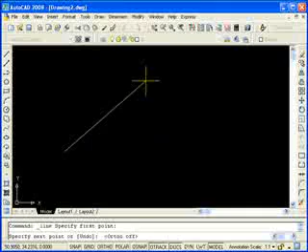Anytime I hit my index finger mouse button, you'll see a red circle pop up. And if I hit my middle finger mouse button, you'll see a blue circle pop up. That's an excellent way for you to follow along and realize what buttons I'm hitting. The beauty of these tutorials is that you can pause, rewind, and slow them down as needed. So again, starting my line command.

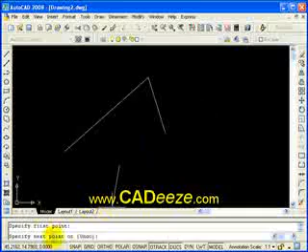AutoCAD's asking me to specify first point. I pick my first point, I get my rubber band. Now on my command line, AutoCAD is saying, okay, you've picked your first point, now specify the next point. Using my pick button, my index finger mouse button, I'm going to pick my second point. And with the line command, AutoCAD just continues to ask me to specify the next point. So I can continue to pick and pick until I'm finished picking points.

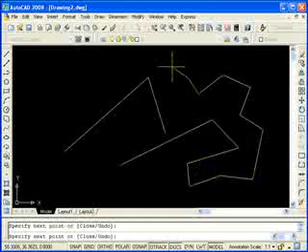When I'm finished, I can hit my middle finger mouse button, and that's going to pull up this menu right here. I can click on any of these options, and in this case I'm going to pick Enter. When the line command is complete, you'll notice I've got a blank command prompt again, ready for my next command.

This time I'm going to type in LINE, hit my Enter button on my keyboard to start the line command, and pick a couple of points. When I'm finished picking points, this time I'm going to hit my Enter key on my keyboard. That again ends the line command.

Remember, you can hit Enter by hitting your Enter key on your keyboard, your middle finger mouse button, or the space bar. This time I'm going to start my line command, pick a few points. When I'm finished and I don't want to pick any more points, I'm going to hit my space bar, and there we go. It ends the line command.

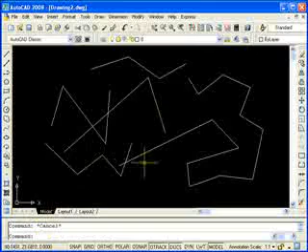Now, if I'm in a command, the line command for example, and I want to get out and don't know how to, remember from the last tutorial what we're going to do: hit our escape key. Hit escape a couple times. I always recommend hitting it a couple times just to get used to it, but really to ensure that you're all the way back to a blank command prompt. Hit that escape key a few times. It doesn't hurt anything, and it ensures you're all the way out of any commands. So if I'm in a line command, picking points, and I want to get out, I can hit that escape key a few times, and that will get me to a blank command prompt.

Alright, the erase command. I can go to my Modify pull-down menu and click on Erase, go to my Modify toolbar and click on the button that looks like a pencil eraser, or type in ERASE and hit Enter. Once I hit Enter, it starts the erase command, and it's asking me to select objects.

Notice my crosshairs turned into a little pick box. AutoCAD is asking me to select objects. As I roll over these objects, AutoCAD turns them into little dotted lines so you can see what you're picking. When I want to pick one, I use my pick button, my index finger button. Pick a line, it highlights it, and I can hit Enter any of three ways: spacebar, Enter key on my keyboard, or middle finger mouse button. It erases the line or object I selected and gives me a blank command prompt.

Okay, I'm going to start the erase command again. This time I'm going to select more than one line, select a few lines. Hit my Enter, either way, spacebar, keyboard Enter key, or middle finger mouse button, and it erases them.

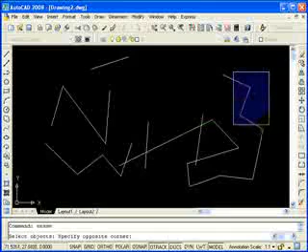Now you may have noticed in your erase command, if you accidentally pick and miss a line, you're going to get this box. If you pull to the left, the box has a dotted outline and is green. If you pull to the right, it has a solid outline. Pulling to the left is called a crossing window: anything within the box or anything that crossing dotted line touches is going to be selected. If I pull to the right, it's a window, meaning anything within the box is going to be selected.

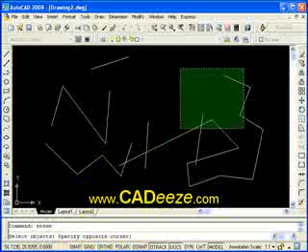We're going to get into these windows a little bit later when we're selecting things, but just so you know, that's what's happening. So if I accidentally start my erase command and pick outside, basically I've picked one corner of this box, and now it's asking me to pick the second corner. You'll notice on my command line it says specify opposite corner. If I come down here and pick my next corner, my diagonal corner, it's going to select the objects. I hit Enter with one of my Enter keys, and I've erased those objects. Play with that a little bit and see what you come up with.